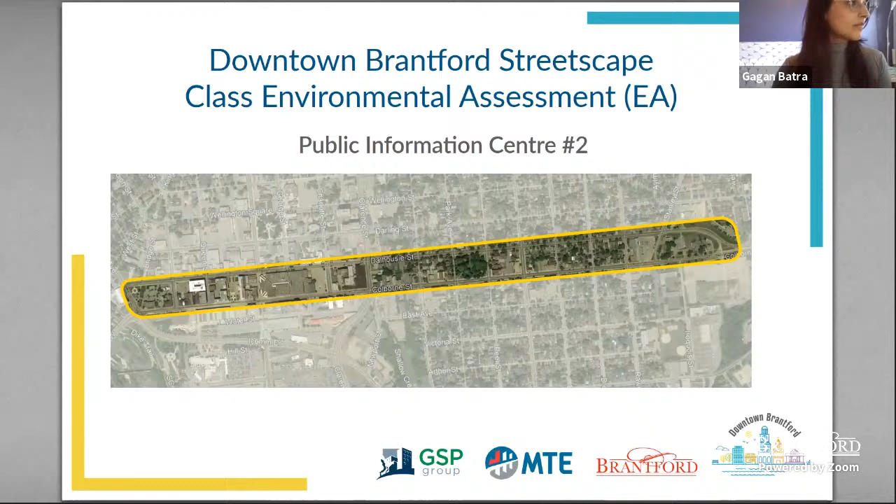We will review the study area, the process, and the status, provide information about the purpose of the Public Information Center we're at currently, and review the feedback received to date, including findings from the surveys and the previous Public Information Center held back in the winter.

We will then go into the evaluation criteria used to evaluate the alternatives being presented to you. We will present five different alternatives and score each one based on the evaluation criteria, then explain the technically preferred alternative and how we got to that option.

Lastly, we will go through the next steps in the environmental assessment process and what you can expect to see over the coming months.

The Downtown Brantford Streetscaping Environmental Assessment is just one part of the city's plan for the whole downtown area. While this study specifically focuses on infrastructure and engineering elements, there are various other studies that have come before, which we have and will continue to consult with and rely on to ensure our project is consistent with the plans for the entire downtown area.

The first study listed here is the 2008 Master Plan for Downtown Brantford. This study outlines plans for creating a vibrant and attractive downtown, revitalizing the core, making it a pedestrian-friendly space, increasing density targets, and bringing people into the area. The master plan was developed through significant stakeholder engagement and acts as a guide for downtown development and growth.

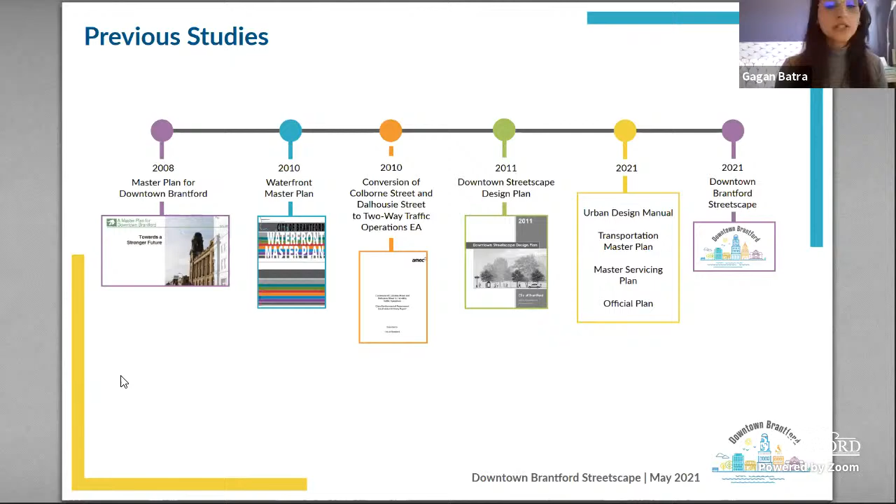Now I will hand it over to Vince to continue on to the next part of the presentation.

The figure here shows the study area, which includes Colborne Street and Dalhousie Street from Brant Ave and Icomm Drive to the east limit where Colborne Street and Dalhousie meet. It also includes the north-south streets between Colborne Street and Dalhousie Street: Brant Ave, King Street, Queen Street, Market Street, Charlotte Street, and Clarence Street.

The project includes the replacement of underground infrastructure as well as above ground streetscaping improvements, which include road configuration, street furniture, plantings, etc. One of the main drivers of this project is the need to replace the aging underground infrastructure, including water mains, sanitary sewer, storm sewer, and other utilities.

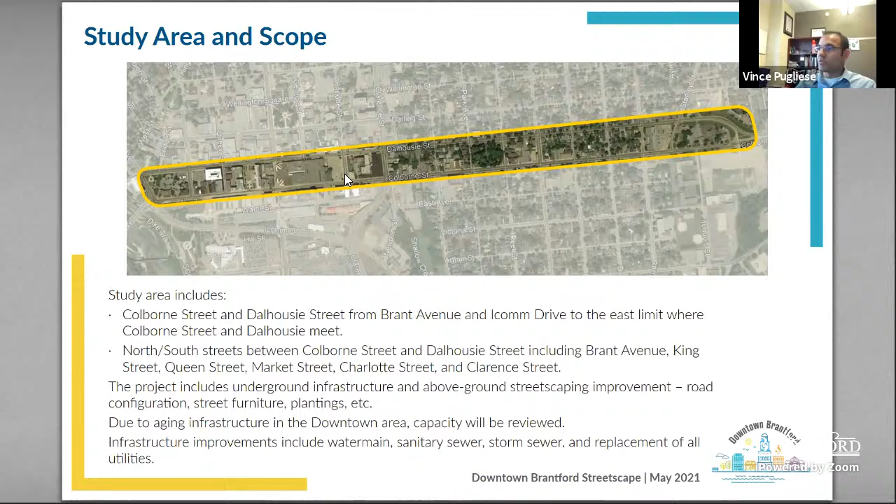Some of the constraints we noticed when the project team went out to site—we conducted a site walk of the study area to identify constraints within the corridor. A few significant constraints were quickly identified, including areas which would not meet current accessibility standards.

Curbside management was identified as a key constraint for the downtown, especially given that there is garbage collection 6 days a week, meaning there is garbage at the curbside nearly every day.

The speed of drivers through the downtown is also apparent when you're downtown. The speeds can be attributed to the width of the lanes, which are generally 4 meters wide, giving drivers a sense of comfort traveling at higher speeds. The lack of delineation of on-street parking also contributes to the open feeling and can contribute to the speed. The high speeds make it challenging for pedestrians to cross the street safely.

We noticed there was no distinct loading area or delineation for key features, and that there's little greenery in many areas downtown. As mentioned, the main driver for this streetscaping project is the need for replacement of much of the underground infrastructure in the downtown.

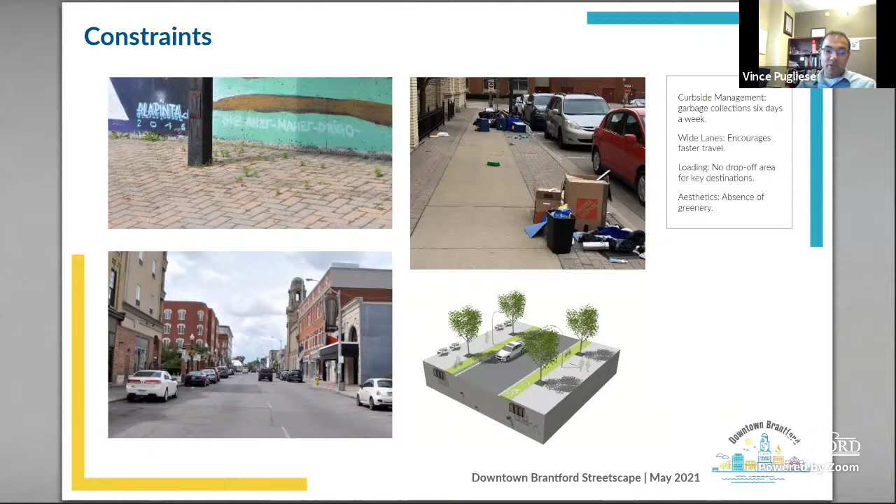The infrastructure improvements will result in disturbing a majority of the right-of-way, which is the land the city owns between property lines from one side of the road to the other. This is a great opportunity for the city to improve the streetscape, as the surface features will need to be restored regardless. Streetscaping projects like this one often coincide with underground infrastructure improvements because the entire surface is being replaced anyway.

After looking at the constraints and opportunities, we developed a vision and problem opportunity statement. These act as reminders of what the objectives of the project are, as it can be easy to start thinking about other things that are in need of improvements as we go along.

The vision for this project is adapted from various downtown and city documents. The official plan for the city and the downtown master plan were incorporated when creating the vision for this project: to create a downtown Brantford that is attractive, vibrant, and safe for all users while providing the necessary infrastructure needed to handle growth in the city's core.

The main objectives of this project and all overarching work being done in downtown are to make it a destination place, enhance infrastructure for all transportation modes, including pedestrians, cyclists, transit users, and to improve accessibility and safety in the downtown. Specifically, this project to streetscape the downtown is addressing the problem opportunity statement to revitalize Brantford's core by improving infrastructure, accessibility, safety, and rebuilding an aesthetically beautiful and adaptable downtown.

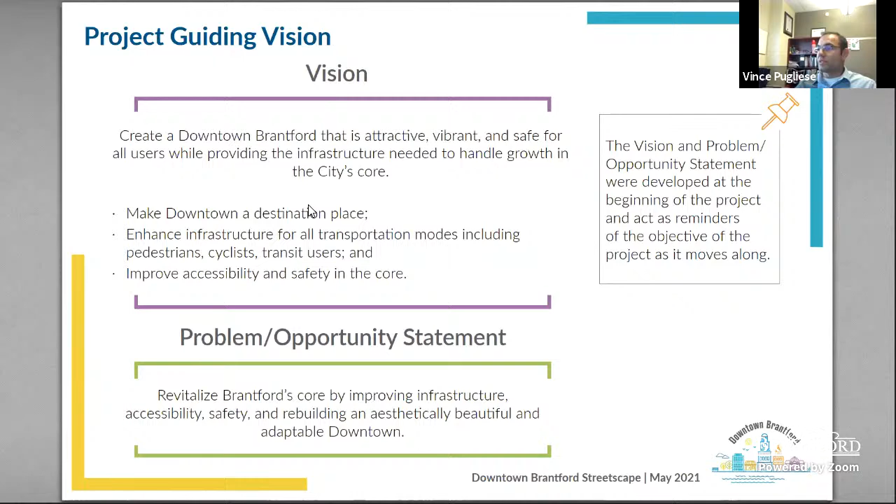This project is following a municipal Class Schedule C environmental assessment process. The study was started in July of 2020. In August of 2020, we held a number of in-person stakeholder workshop sessions to gather feedback on the proposed streetscaping. We took the results of the workshops as well as the various stakeholder meetings to the public at PIC number 1, held in December of 2020.

We are at PIC number 2, where we're presenting the technically preferred alternative. A third and final PIC is planned for sometime this summer, with the environmental study report expected to be submitted before the end of the year.

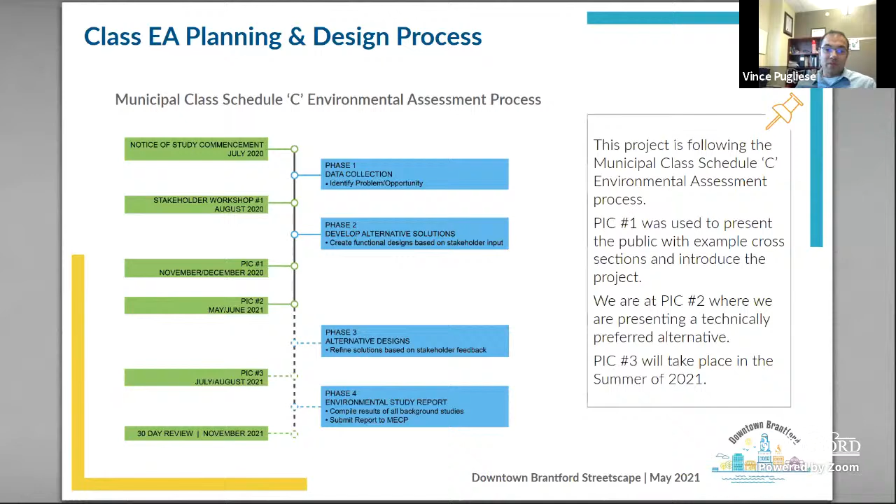There are two main objectives for tonight's PIC. The first is to present the design alternatives generated by the project team based on stakeholder feedback, as well as run through the evaluation process. The second is to present the technically preferred alternative and the rationale supporting the selection of that alternative.

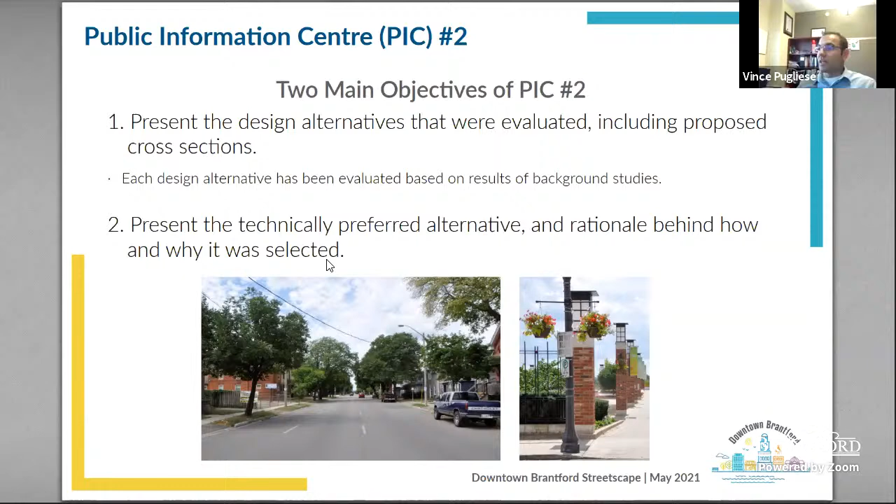Through stakeholder engagement, it was clear that having a dedicated cycling facility was important for the downtown. If cycle lanes are going to be successful long-term, in that they will dramatically increase the number of cyclists downtown, then there needs to be connectivity with other cycling facilities. Creating cycle lanes in isolation will not be successful long-term.

While not pictured here, there's also potential to create a greater cycling network by connecting the downtown with the pedestrian cycling bridges over the Grand River.

As part of the environmental assessment, a number of supporting studies have been completed, and the results factor into the evaluation of the alternatives. A natural environment study was completed, which indicated that there were no significant impacts expected to the natural environment. In fact, by including additional street trees, we'll actually be improving the overall habitat for wildlife downtown.

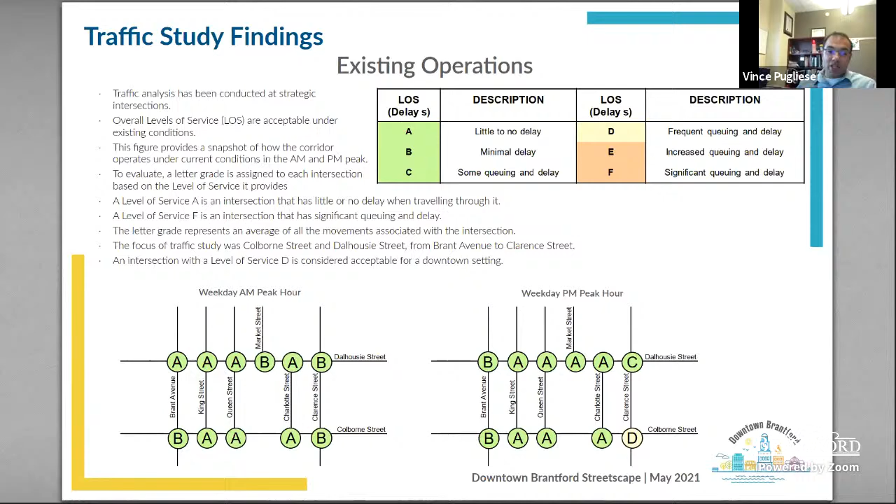When the level of service is displayed at each intersection, we get a picture of how traffic moves along Colborne and Dalhousie. We focused our attention on the intersections from Brant Avenue to Clarence Street for this evaluation. When you're looking at this figure and the next couple, please note that a level of service D is generally considered acceptable for an intersection in a downtown core.

The traffic study included an evaluation of the corridor under a one-way and two-way scenario, using 2041 traffic projections as per the city's transportation master plan. Under the one-way scenario, we see significant impacts to traffic along Clarence Street in the PM peak, but the rest of the corridor maintains a sufficient level of service.

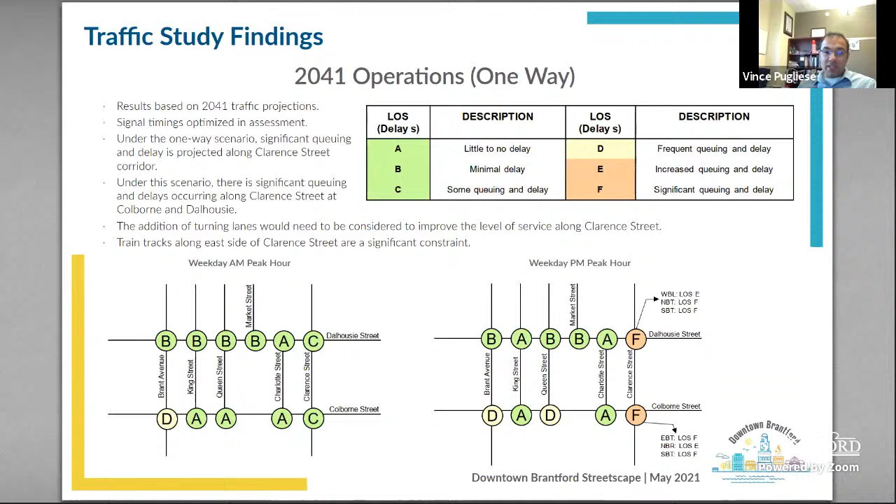The issues we see along Clarence come from the fact that currently there are no turning lanes at Colborne or Dalhousie, and this causes backups when someone attempts to turn left. Through this EA, we'll be looking at whether there is an opportunity to add turning lanes along Clarence. The main constraint to doing that is currently the active train tracks that run along the east side of Clarence.

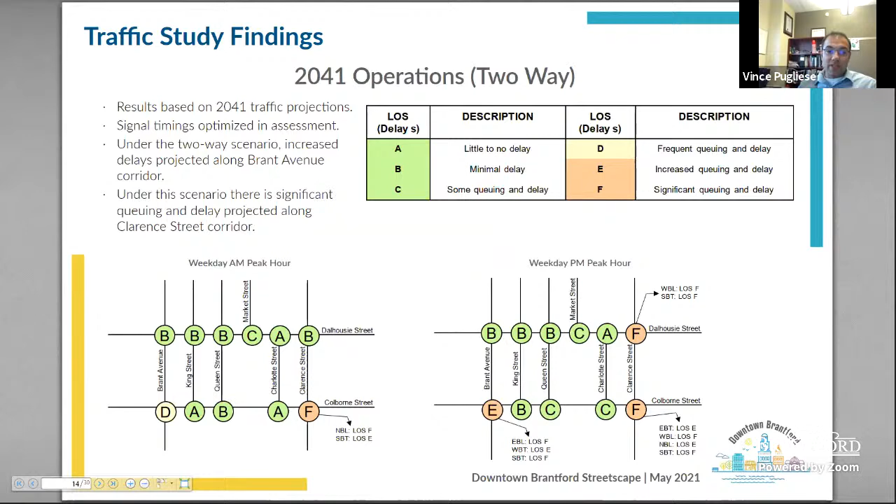Under the two-way scenario, we see the same problems along Clarence in the PM peak, but now we see delays in the AM peak as well. We also start to see some further delays at the Brant Ave intersection with Colborne.

The traffic study has some limitations, and so there are certain factors that impact traffic that don't show up in these results. Factors like garbage collection, loading, unloading, other curbside management, and maintenance, etc. We'll capture the impact of these factors in the evaluation of each alternative.

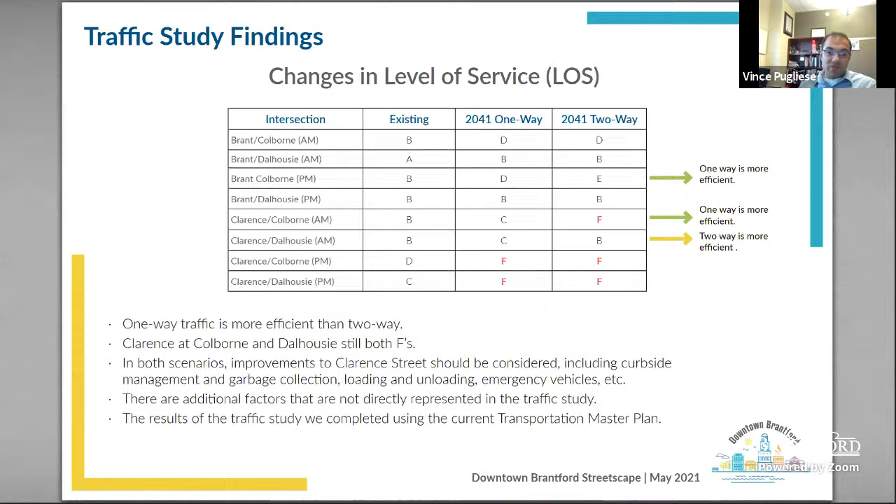The parking study looked at the capacity of on-street and off-street parking in the downtown. There are 1,682 parking spots downtown, including 1,141 off-street and 541 on-street spots. For the purpose of analyzing parking, we've assumed on Colborne and Dalhousie, parking will be on one side of the road only. The decision to remove parking from one side of the street in our alternatives was to accommodate feedback received throughout the project that the downtown should create more opportunities for other modes of traffic, including cycling lanes.

In the vision for this project, as well as the city's transportation master plan, the city's commitment to active transportation is apparent. And for this reason, the options being presented will prioritize creating a more pedestrian-friendly and cycling-friendly environment. With parking on one side of the road, we see that it will reduce the number of on-street spots by 84, 40 on Colborne and 44 on Dalhousie.

Prior to COVID, the parkade operated at approximately 60% capacity, and the overall reduction in parking expected downtown would be 5%. As the design progresses, we'll look at a variety of ways to reduce the amount of on-street parking that is lost. One approach is to introduce flexible parking spots that can be changed throughout the year.

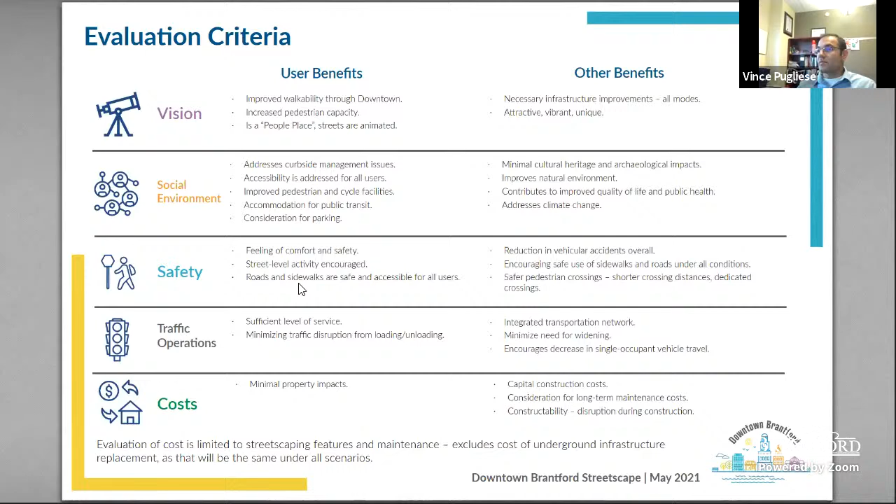The alternatives, which we will discuss in detail, the options are do nothing, two-way traffic with a bidirectional bike facility, two-way traffic with a separated bike facility, one-way traffic with a bidirectional bike facility, and one-way traffic with a single separated bike facility. Please note that the alternatives noted above were generated based upon the feedback and comments received through consultation with stakeholders and the public up to this stage of the project.

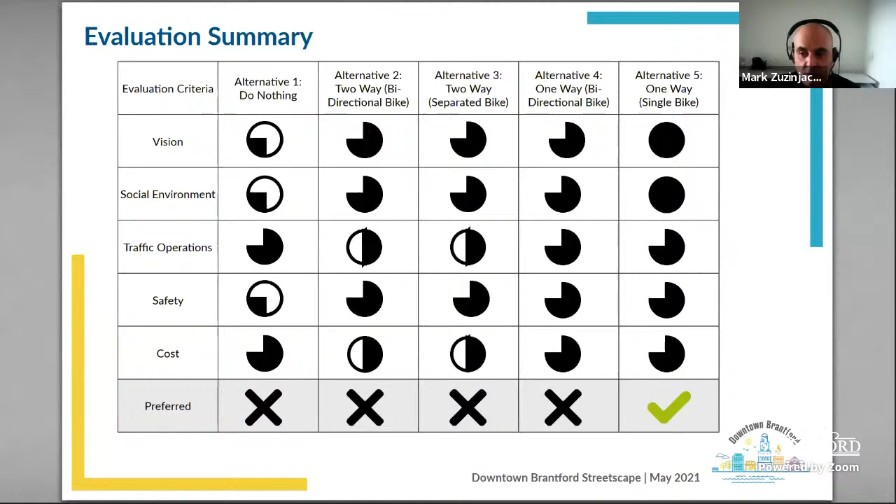In creating these alternatives, it was made clear that due to the restrictions from the narrow right-of-way in the downtown core, which is 20 meters, that not all elements of streetscaping could be included at the same time. For this reason, cycling lanes, pedestrian space, parking on at least one side of the street, and vehicular lanes were prioritized. Based upon our evaluation, we've determined that the technically preferred alternative is a one-way alternative that includes a single bike lane, as demonstrated by alternative number 5. The following slides will provide a brief overview of each of the alternatives that were assessed and how each fared in relation to the evaluation criteria as noted.

So alternative 1 shown on screen is the do nothing option. As part of the municipal class EA process, it is necessary to evaluate the do nothing alternative, in this case, alternative number 1. The do nothing suggests that we drop the project completely. If we were to take this approach, the streetscape would remain as is.

Obviously, without making any change, the opportunity to implement enhancements which complement the city's vision for the public realm of downtown would be missed. In order to meet the vision of a more attractive, more vibrant, and safe destination that is welcoming and accessible for residents and visitors, which can accommodate future growth and development of the downtown, change in the form of repair or enhancement is required. This applies to both the aging infrastructure below grade as well as the surface treatments and elements that you see at grade. Without any improvements to the aesthetics, accessibility, and without the provision of cycle lanes, this alternative scores low in terms of social environment.

From a traffic perspective, the current configuration of lanes and curbs does move traffic well through the downtown. However, despite accommodating current traffic, the current condition does not address the speed of traffic downtown, which is a major contributor to the overall safety of drivers and pedestrians. As a result, this option does not provide the most opportune condition for creating a safer public realm for pedestrians.

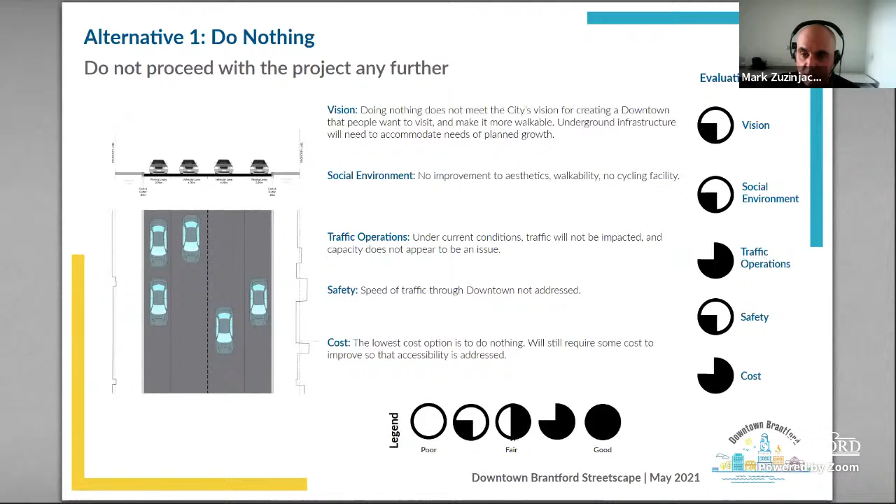So alternative 2 is a two-way option with bi-directional bike facility. This alternative includes conversion to two-way traffic on both Colborne and Dalhousie and has a dedicated bi-directional bike cycle facility along with lay-by parking on one side of the road. Through our evaluation, we considered the opportunities this alternative presents towards achieving the overall vision as it addresses the inclusion of active transportation, improves pedestrian facilities, and narrows the roadway, which should lead to traffic calming and slower speeds.

A limitation to this alternative is that with the introduction of cycling facility and lay-by parking, the space available for patios and street furniture is the same as the existing condition. While the opportunity with this option would allow for resurfacing of the pedestrian realm and increase accessibility for pedestrians, the limited space available for additional pedestrian amenities is constrained. Although there are current subgrade technologies that allow for street tree plantings within a narrow space, the addition of any trees to the streetscape would further constrain the widths available within the sidewalk area for pedestrians.

Another challenge to consider with this two-way traffic alternative is a greater impact on traffic from the perspective of curbside management. With only one lane in each direction, a stopped garbage truck or delivery vehicle would bring traffic to a stop.

As a result of this, in combination with the traffic study analysis, this alternative has received a lower measure of score towards traffic operations criteria. The narrower road widths, lay-by parking that is located behind the curb, and provision of a separated cycling facility result in a higher safety evaluation. With respect to pedestrian crossing, two-way would require increased attention when considering vehicular movement in both directions.

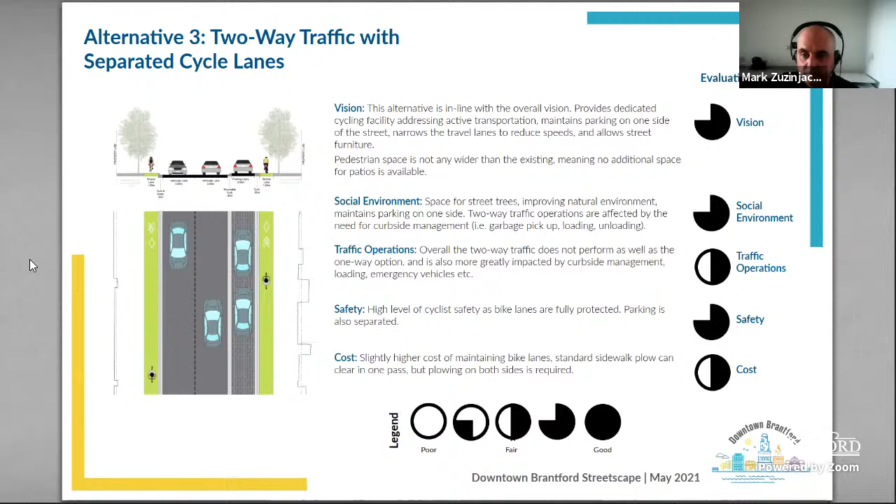Alternative 4, one-way traffic with bi-directional cycling. Alternative 4 proposes a one-way alternative that includes a bi-directional cycle facility, which is protected behind the curb, and parking on one side of the road only through a lay-by, which is also behind curb. As per the previous alternatives presented so far, the cycle facility, along with the reduction of traffic lane widths and surface improvements to the pedestrian walkways, results in a favorable rating towards aligning with the project's overall vision for downtown.

Also similar to the two-way options, the provision of two cycle lanes and parking on one side mean that functional space remaining for pedestrians would again remain relatively the same as the current condition. Given the space constraints of the right-of-way, there is a trade-off with every feature we include, as each requires their own minimum footprint within the right-of-way.

Where we see the biggest difference between the one-way and two-way options is in the operation of traffic and the impact of curbside management. In a one-way scenario where there is garbage collection or loading, cars can change lanes to pass the parked vehicles without any delay, and there is still little need for dedicated loading zones or laybys for curbside management.

In all of the alternatives, we expect a high level of safety, as the main factors that will contribute to improved safety will be narrower lanes that slow traffic, reduced pedestrian crossing distances, and cycle lanes that are separated from the travel lanes. A common thought is that two-way traffic operations have the effect of slowing traffic. However, in a one-way scenario, the slowing of traffic can be achieved by narrowing the lanes to naturally reduce the speeds at which people drive.

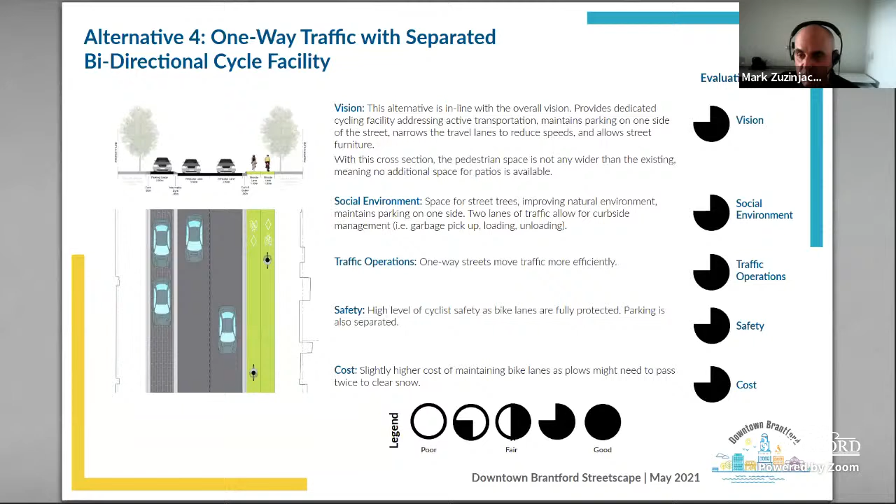The addition of more pedestrian crossings and other elements. As providing safety is a main focus of this alternative, these safety measures are applied in the evaluation of each cross-section alternative which proposed change to the right-of-way. Alternative 5, one-way single bike lane. Alternative number 5 is a two-lane, one-way roadway that includes parking on one side and a unidirectional separated cycle lane.

Per our review of the evaluation criteria, this alternative was determined to be the most favorable towards aligning with the vision of the downtown, as it is the only alternative that allows for widening the pedestrian and patio space, or potential patio space, from what exists currently. Due to the reduction of space required for 2 lanes of cycling on each street, there is extra width gained in the cross-section. As a result, there is increased opportunity available for pedestrian seating or patio areas, street plantings, and other pedestrian amenities that create a more walkable and accommodating public realm and increase social opportunity.

Similar to the previous one-way alternative, there is less impact to traffic due to curbside management, and overall one-way traffic moves vehicles more efficiently. In this preferred alternative, cyclists would ride in the same direction as vehicles, and the side streets can be used as a connection between Colborne and Dalhousie, similarly to how they are used for vehicles. From a cost perspective, this alternative would have the least amount of maintenance required for the upkeep of the cycle lane.

Based upon the opportunity to widen the pedestrian realm, and the benefits which come with this increased space, alternative number 5, as shown on the screen, is determined as the preferred alternative for allocation of programming within the right-of-way.

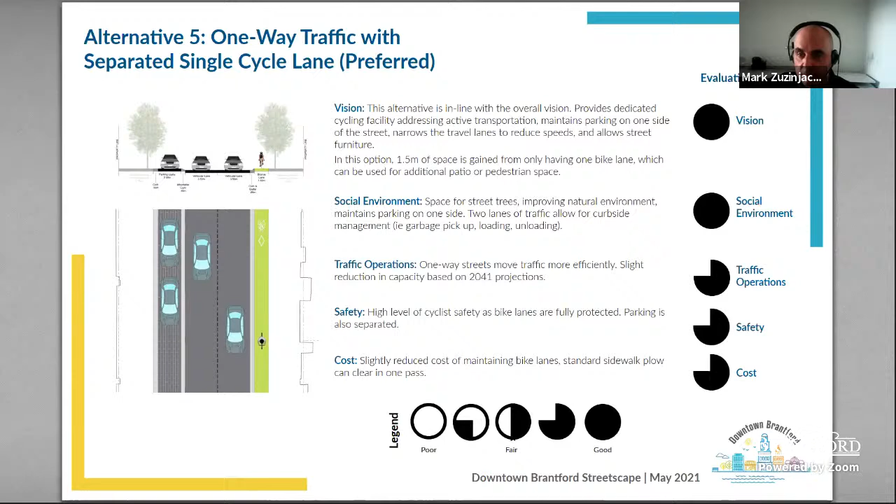So, preliminary options that were screened out. There were some additional alternatives for elements of the right-of-way that were explored during consultation for this project.

On-street cycle lanes, either shared or dedicated lanes not separated by a curb, were considered. However, the drawbacks included further widening of the asphalt lanes that may encourage faster speeds, reducing opportunity for traffic calming and reducing safety for cyclists. This option created too many conflict points between vehicles and cyclists maneuvering in and out of parking spaces or laybys, so it was not carried forward.

One-way traffic with a single lane to maximize the space available for sidewalks and treatment behind the curb was also explored. However, a single traffic lane would significantly hinder traffic flow during curbside pickup and would likely increase response times for emergency service vehicles moving through the downtown.

We also considered applying varying right-of-way alternatives for Colborne and Dalhousie, but there was concern over the potential creation of inequality of cycling, parking, or pedestrian opportunities for businesses and residents. As a result, it was determined that applying a consistent cross-section for both streets was the most equitable approach.

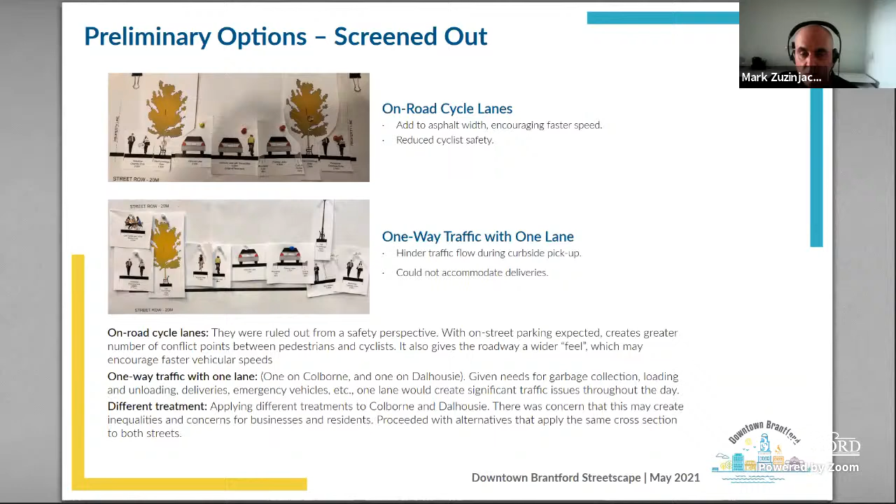Upon review of the alternatives proposed and the evaluation criteria used to determine a preferred approach, you may be left wondering why these criteria are so important.

To demonstrate the impacts that some of the enhancements proposed can have on the revitalization of streetscapes and their contribution towards creating a more welcoming and walkable destination for pedestrians, we felt it was important to once again show how some of these principles were applied and implemented in other municipalities and the effects they had on the pedestrian realm. The first example shown is from King Street in downtown Kitchener.

The images at the top of the slide show the pre-construction condition of the right-of-way, as the design of King Street was more conducive to vehicular movement rather than the accommodation of pedestrians and cyclists. Narrower sidewalks with limited space for streetscape amenities such as trees or seating areas provided for a bleak pedestrian experience.

The image on the top right shows a typical raised planter in the pre-construction condition with limited soil volumes, which resulted in trees of poor, deteriorating condition. In this case, the tree was removed from the planter that can be seen.

Extending from Frederick to Francis Street, or five street blocks, the images at the bottom of the slide show the post-construction condition, which shifted the emphasis of the road's operation to instead prioritize pedestrians and cyclists by narrowing traffic lanes and increasing the width of the pedestrian realm behind the curb.

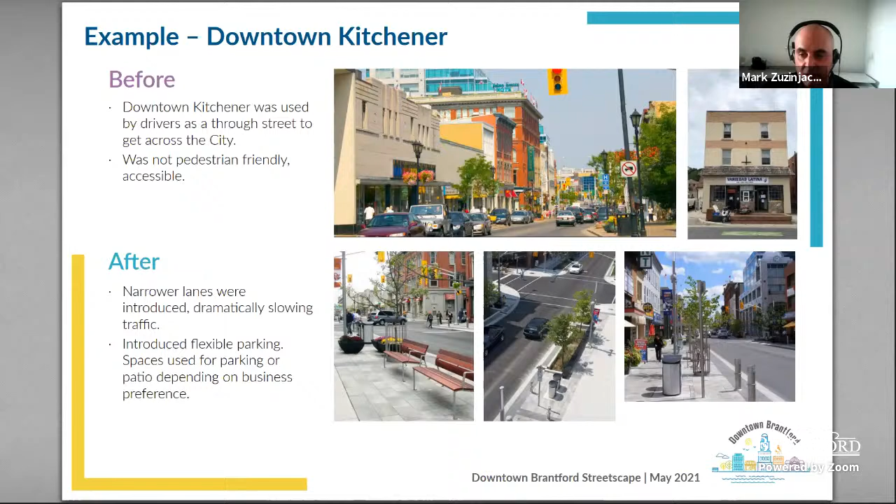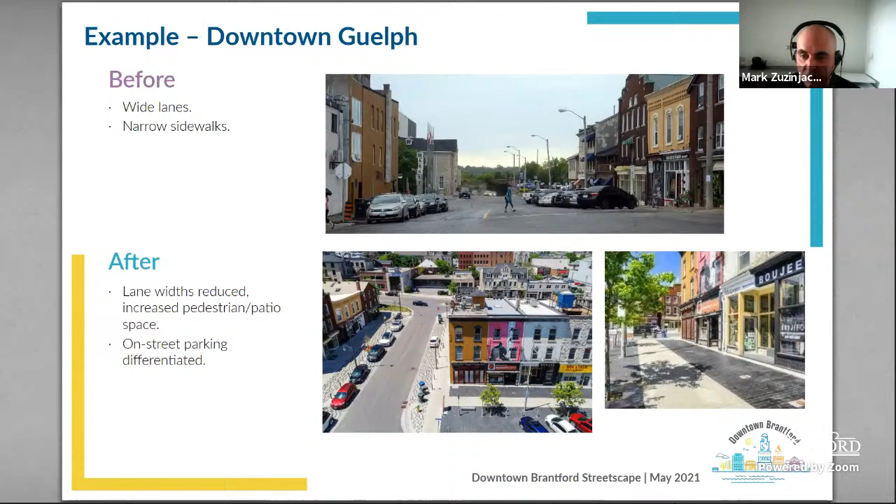The use of the space and surrounding streets for pedestrian use was limited, with limited amenities to frame the space. Commercial space along Marketplace was subject to vacancy and turnover rates, with limited space for storefront displays or patio seating.

This also provided laybys for buses as traffic calming elements to slow the speed of vehicles as they move by. The extension of the pedestrian paving into Marketplace also acts as a traffic calming element, and as the laneway is narrowed, sidewalks in front of the storefronts are widened.

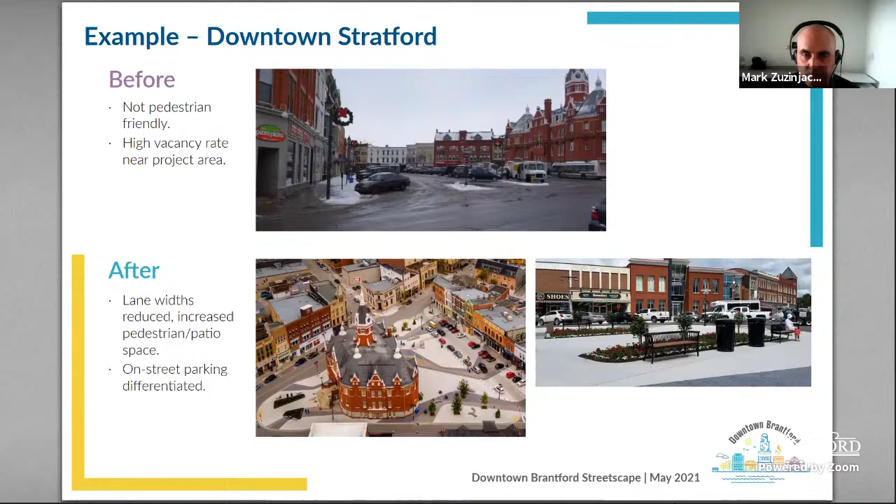So in terms of the study and next steps, as we've moved towards the presentation and preparation of these alternatives, the next step for the study area is actually fitting them onto the site. We've developed these conceptually with ideas collected through our own interpretation of the site and input from stakeholders and the public up to this point.

Moving forward into detailed design, our role now is to take the comments received tonight and through correspondence from the public through this PIC, and then we will be applying the designs to see how they fit specifically into the right-of-way along the street, with an understanding of specific conditions that will influence how the design is laid out. We will be looking at opportunities for implementing safe pedestrian crossings.

We will be providing specific locations and more detail about specific streetscape elements—the things you see and get to touch and experience, including surface types, site furnishings such as benches, and planting opportunities which improve sustainability and stormwater retention. We'll also be looking at how the required infrastructure might influence the at-grade improvements for the right-of-ways of the study area.

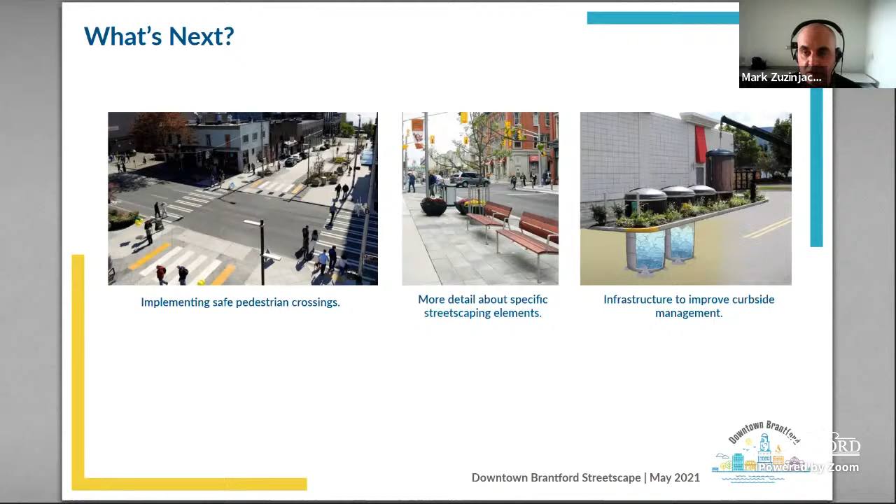Thanks, Mark. The next slide shown here really just goes through the next steps in the environmental assessment process. As you can see from the first dot, following this live presentation, we will have a question and comment period open for two weeks in which the public can submit their questions, comments, or any feedback regarding the material we've presented today or anything else related to this project.

They can submit it directly to the project team through Let's Talk Brantford and various other avenues. All that feedback, questions, and comments will be compiled and posted in a question and answer document on June 3rd, where the project team will go through, compile all of them, and provide answers. That will go live on our website on June 3rd.

Following that, we are going to have another public information centre, our final one, in the summer of 2021, where, as Mark said, we will provide more detailed information about the recommendations and specific streetscaping elements being proposed. Following the last PIC, we will present the findings and recommendations to council, and then we can finalize and file this project report for public review. We're expecting that to happen sometime in November or December of this year.

Pending council approval, we will be moving into the detailed design stage for the cross sections, which will likely occur between 2022 and 2023. Following that, we can start construction, which will begin in 2023, again pending council approval.

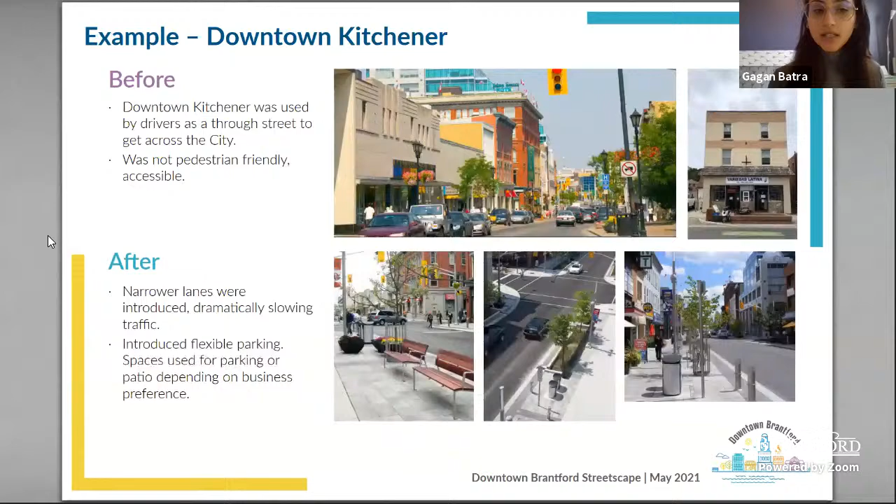Okay, thanks. Before you address the parking, Elizabeth, I wanted to address one thing you said: that right now not a lot of cyclists come downtown. I think it's really difficult at this point to anticipate whether this will bring in more cyclists to your businesses, because right now there haven't been very many cyclists since there are no cycling lanes. The rationale is that if we provide that infrastructure for people to come downtown, with a connection from other parts of the city and the trail network, it'll start bringing people in with a safe option to cycle into downtown and somewhere to store their bikes.

And maybe Vince, if you want to talk about the parking. So with regards to parking, if you look at the downtown parking currently, for most of the corridor through downtown there's parking on both sides of the road. So there's very little opportunity to increase the amount of parking downtown, because it's pretty much maxed out as to what you could have on street parking. And it's a high level of parking compared to any downtown. What we're trying to do is balance priorities.

So there is a priority for cycle lanes, and there's also a strong priority for parking. We understand parking downtown is important for the businesses there, and by no means are we suggesting we'd be eliminating all of the parking. We're trying to establish a level that's acceptable for the amount of parking we could trade off for other features we're trying to include, like better pedestrian spaces, wider walkways, and cycling lanes through downtown. So there's a contingent with priority for parking, but there's also a priority for the cycle lanes.

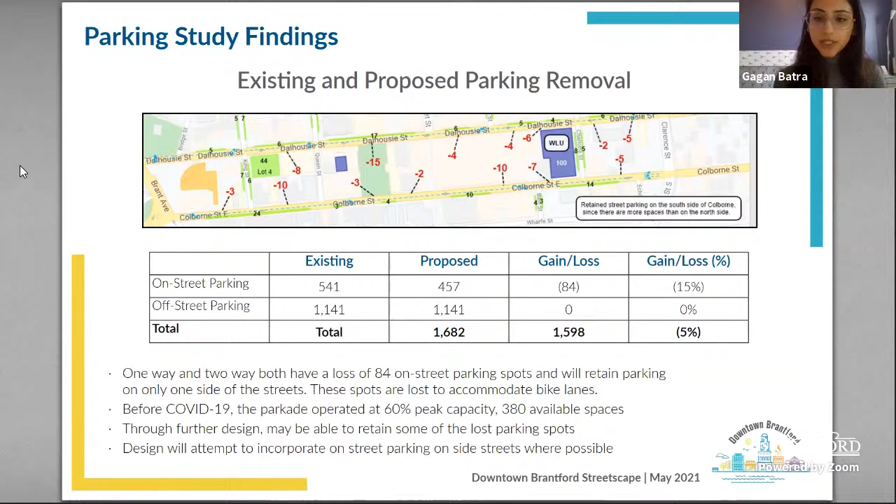As we mentioned, there are additional studies being done concurrently to this and right before this. One was our transportation master plan, which spoke to including more active transportation options. We have staff dedicated to active transportation at the city looking at various options for connecting our transportation networks for cycling lanes. Not pictured here are the Brant's Crossing and TH&B Crossing bridges, which are immediately beyond the downtown study area, but we're going to be looking at how to connect those two pedestrian bridges to this downtown area to create that larger cycling connectivity. We're waiting for environmental assessments to be done, and then future capital projects can be planned for additional cycling lanes. I hope that answers your question.

I don't know if I have other staff here who wanted to answer or add more.

Because we're looking for a nice entryway from the trails to the downtown, I thought now would be a better time than ever to bring that up. I think that's all the questions I have.

Thank you, and I'll submit anything else. I'm not sure if anyone else from the BIA besides Liz is listening, but I'll take this back to our next meeting and see what everyone thinks, and come back to the next PIC.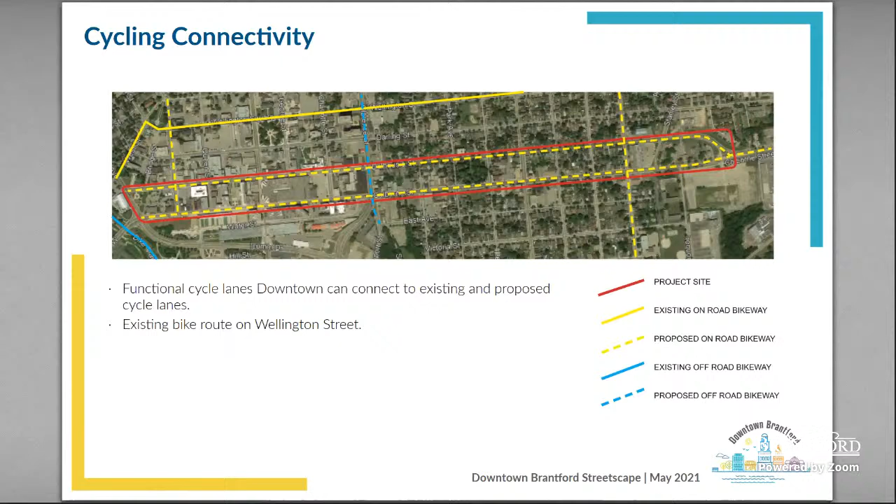Oh, Maria, you're muted. Yeah, I got you. Sorry. We'll go to the first question from Let's Talk Brantford, which I think has been covered in some of the consultants' presentations tonight, but perhaps could be synthesized into a concise answer: what are the key benefits of this project to the community as a whole? Not just centrally how it would benefit residents and businesses within the downtown, but broadly, how would it benefit the community as a whole?

Yeah, I can take that. The project is really split into two different parts as the project team went through it. The first is the underground infrastructure, which really necessitated this environmental assessment. The second part is the above ground features and streetscaping that Mark talked about. The benefit of the underground infrastructure improvements is really to address any aging infrastructure that might limit the servicing capabilities.